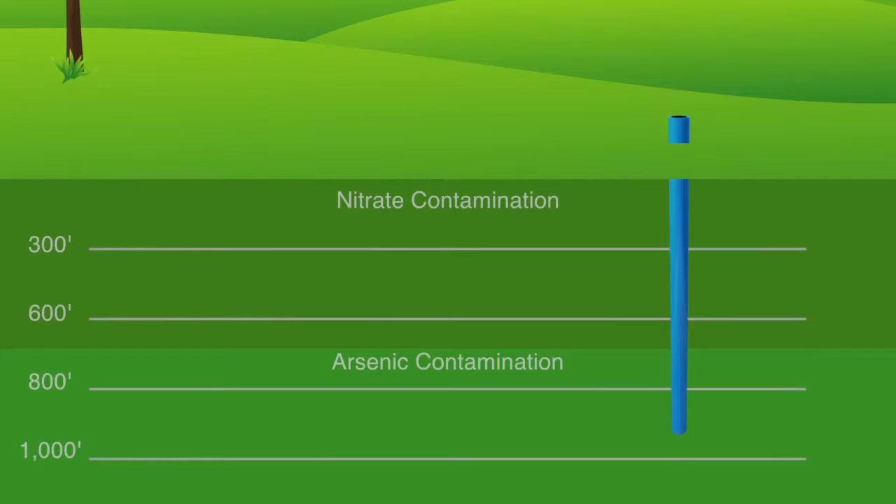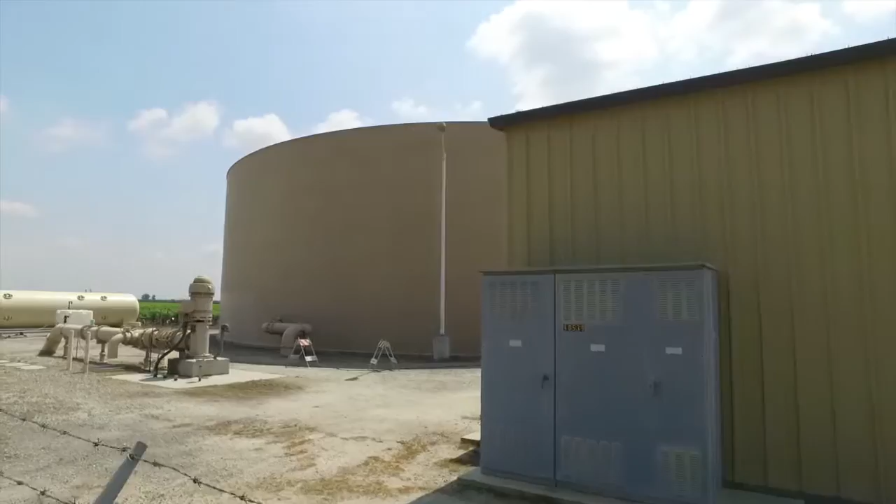So when the MCL changed for arsenic, we would have to either treat the wells that we had, or we'd have to drill new wells. Out of 14 wells we drilled, 5 had to be abandoned because we couldn't make viable wells. The other 9, 2 of those we're having to treat. So we're shooting about 50%.

The community is very aware that they are paying for quality water and they want to get it on time all the time. Nitrates going up and having to shut down that well was not going to be a pretty thing. So nitrate comes from a number of sources, including farm usage around here, very much an agricultural area. That's the most common source for nitrates. We also can get it from septic tanks.

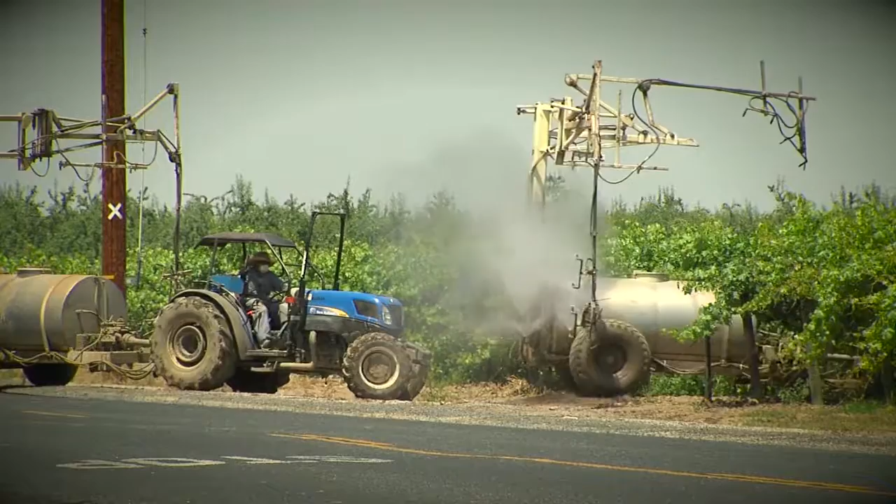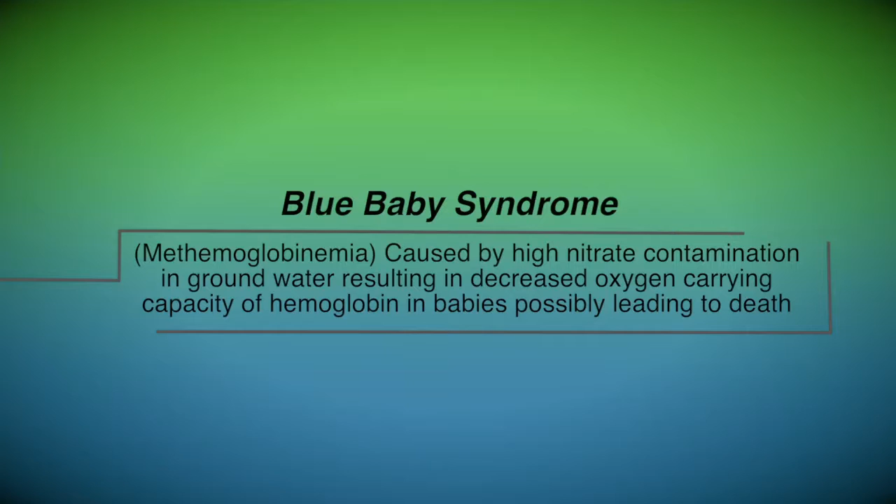The challenge is that it affects our populations in various ways in a negative way. And there's even new research showing that there's even greater effects on the wider population that aren't yet quite understood. The main known health effect associated with nitrate is called blue baby syndrome. It's essentially a reduction in the oxygen carrying capacity of the blood. And this is a particular issue for infants where nitrate gets into the gut, can be converted to nitrite, and then literally the capacity for oxygen in their blood decreases. So you lose the ability to move oxygen throughout the body.

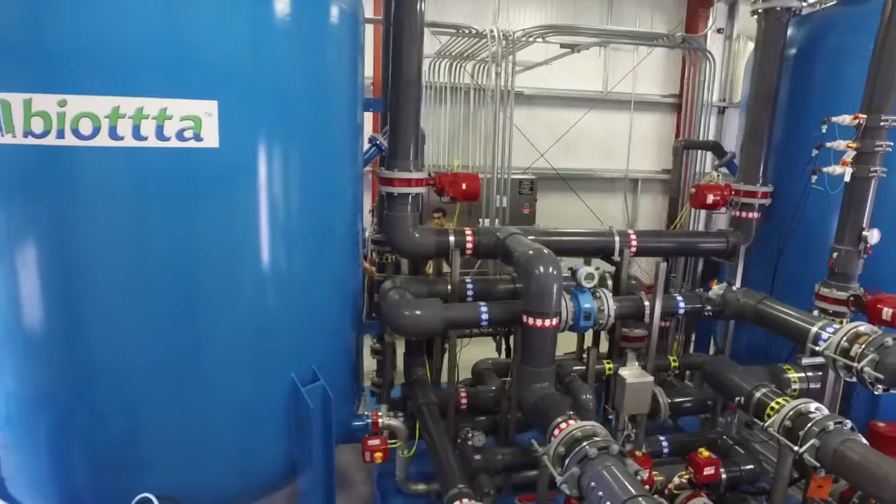Biological treatment is really an old school concept of using naturally occurring bacteria that are already in the groundwater, letting them grow up into a biological reactor and using them to chew up the contaminant and convert that contaminant to a completely harmless end product. You might call the nitrate to these organisms kind of like a Hershey bar. They're able to utilize the energy that comes from that, and that's how they grow. That's how they get the energy to grow.

MCL stands for maximum contaminant level. It's essentially the standard that the EPA sets for a particular contaminant in the groundwater. This particular well has a nitrate treatment issue. It's now above the legal limit for nitrates in the groundwater, and so a treatment system has to be put in place in order for them to use this as a reliable source of groundwater for the drinking water system.

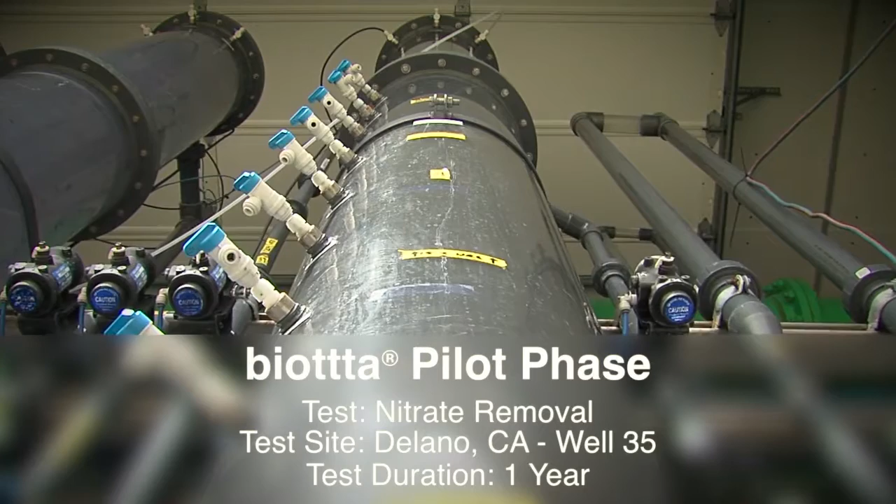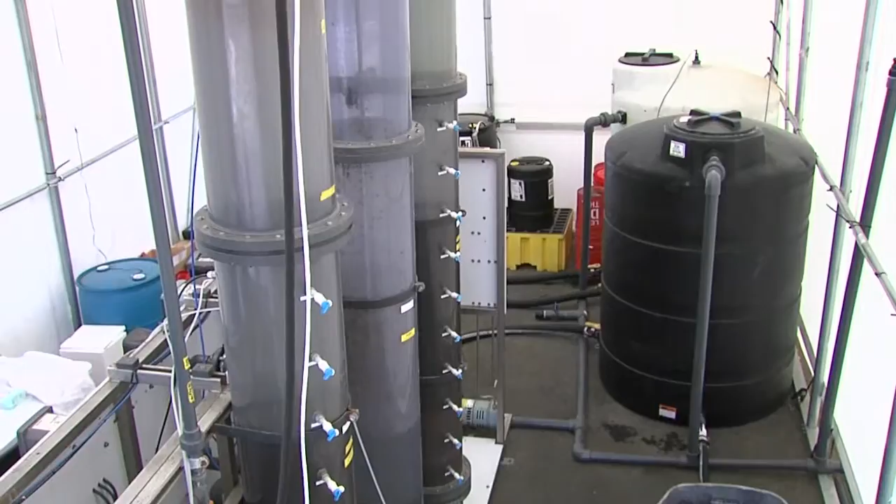So this is the City of Delano well 35. This is about our 3rd generation biottta pilot. We have the raw water that's coming in, and you can see it's going to these break tanks. So once the water gets there, the pilot takes over. And there are basically 4 main components to these pilots.

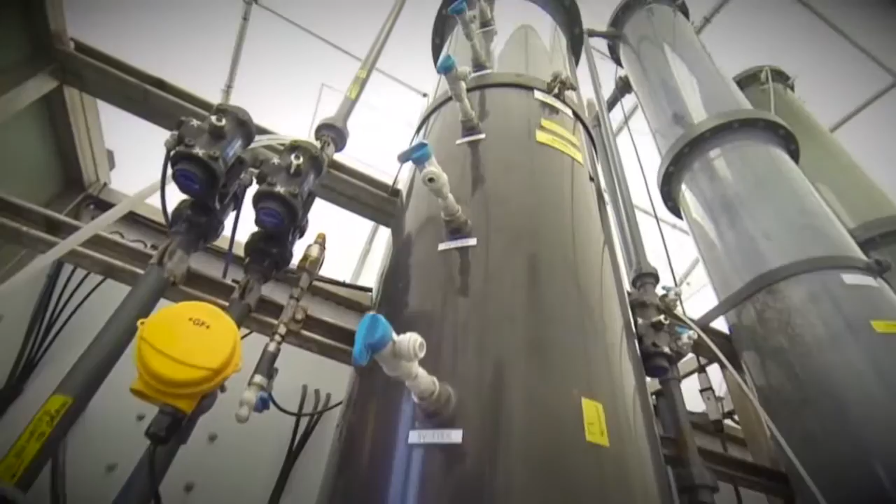There's the unit processes, these tall columns right here, a feed pump here that takes water from the raw water break tank and pumps it through the system and to the unit processes. So this is the first stage fixed bed bioreactor here, where all the nitrate gets reduced to nitrogen gas. So this is the granular activated carbon that we use.

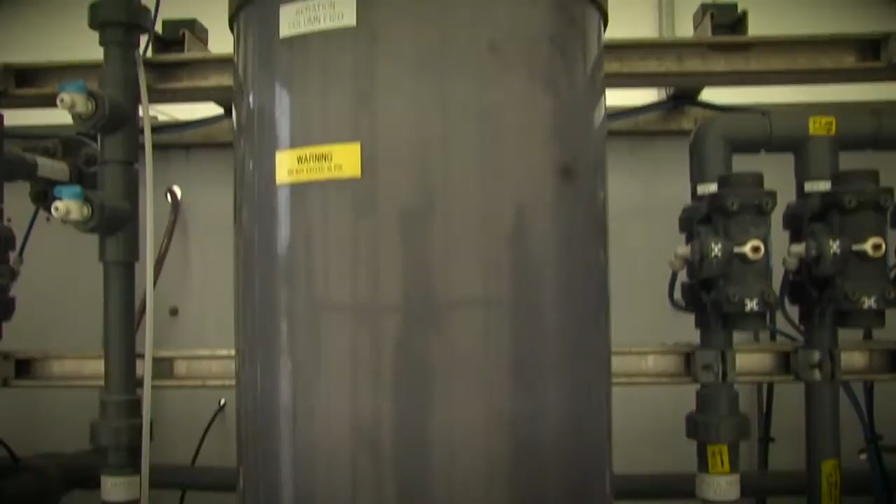As you can see, this is absolutely fresh activated carbon, so we're not inoculating bacteria before we put them inside the BIOTTTA process. So we use bacteria that's already existing in the groundwater. The water then passes, it can either go into the second column, which is a degas unit, or it can bypass that column altogether and go into the second stage aerobic biofilter, that third column right there, which is both sand and GAC. So the first component is the unit processes.

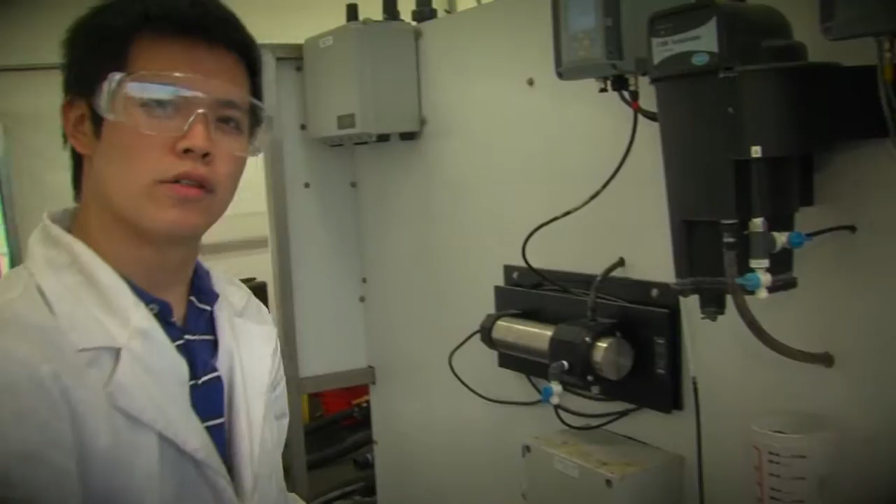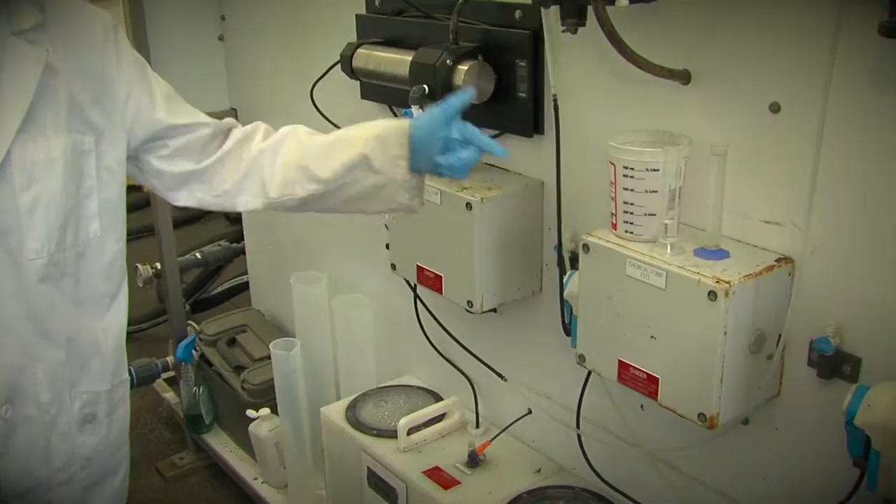The second main component of our BIOTTTA pilots are the chemical feeds over here. You can see 5 tanks down below here that we keep full of like the food for the bacteria. These tanks are filled every few days or so, and then little peristaltic pumps feed those chemicals into different parts of the unit process. So right now I'm making chemical stock for the chemical tanks that feed into the BIOTTTA process. So you can see these are the peristaltic pumps, and we can automate so that they pump a certain speed, a certain dose into our BIOTTTA process.

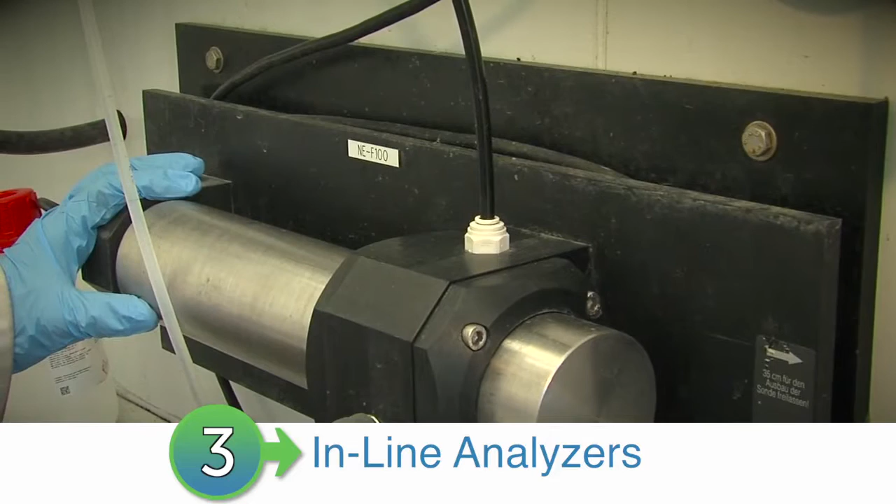The third part of our pilots are the inline analyzers, which you see above the chemical feeds. We have our inline nitrate analyzer, dissolved oxygen meter, and then 2 turbidimeters here as well. Perhaps the most important is the brains. The fourth component, our PLC, which runs the system.

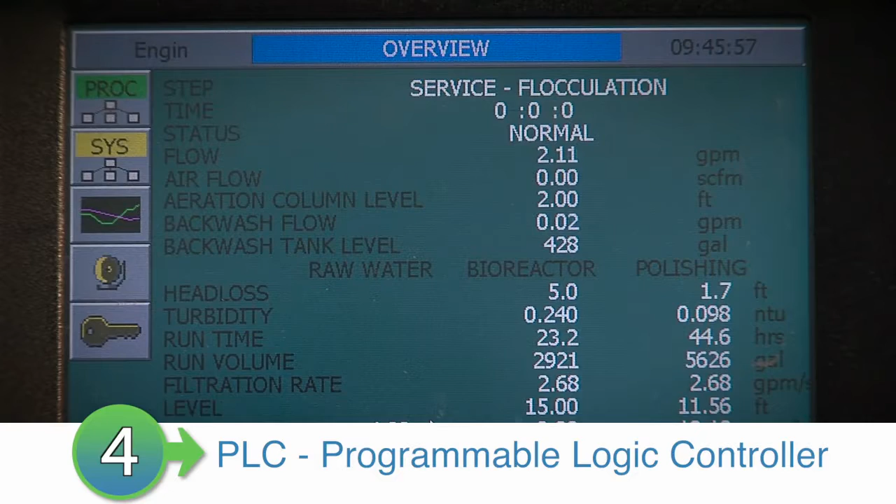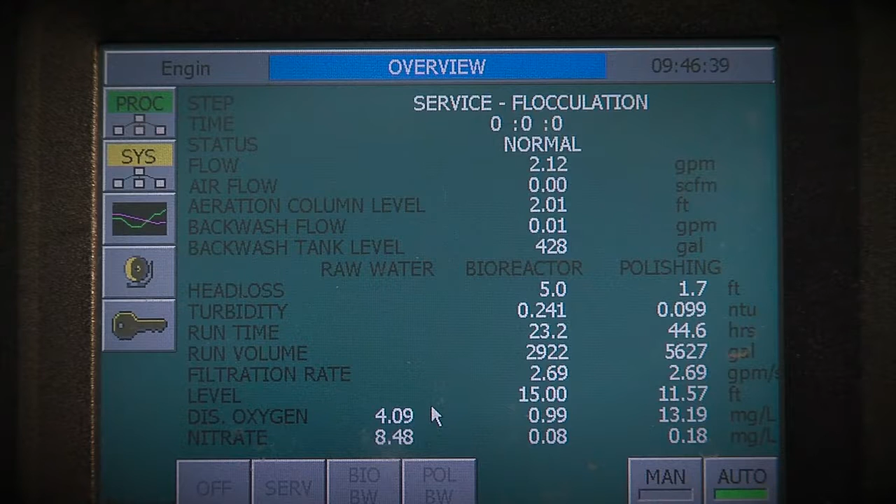It's very important that these systems are completely automated, so the system is programmed based on the operating set points that we've developed and honed over the years, and we can go in here, physically set those operating set points if we want, and download data and so forth right here on site, or this same human-machine interface right here, I can download onto my laptop wherever I happen to be, and look at that same screen and change operating parameters, download data, and things like that. This is the whole thing that makes the system go.

There are 2 main reasons why the BIOTTTA system is particularly green. One is that it converts contaminants to harmless byproducts. The second thing is that the BIOTTTA system requires very, very low energy to operate. The O&M costs on this system tend to be very low. We want to be able to put these systems in, and then they just go.

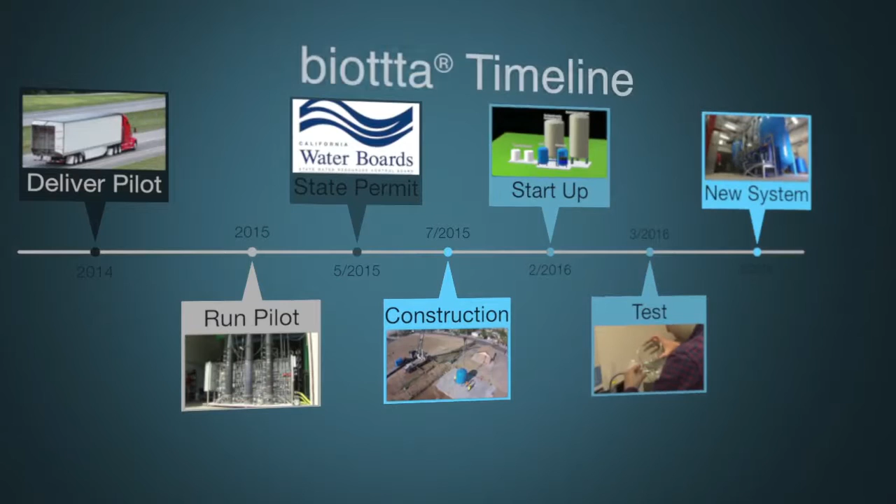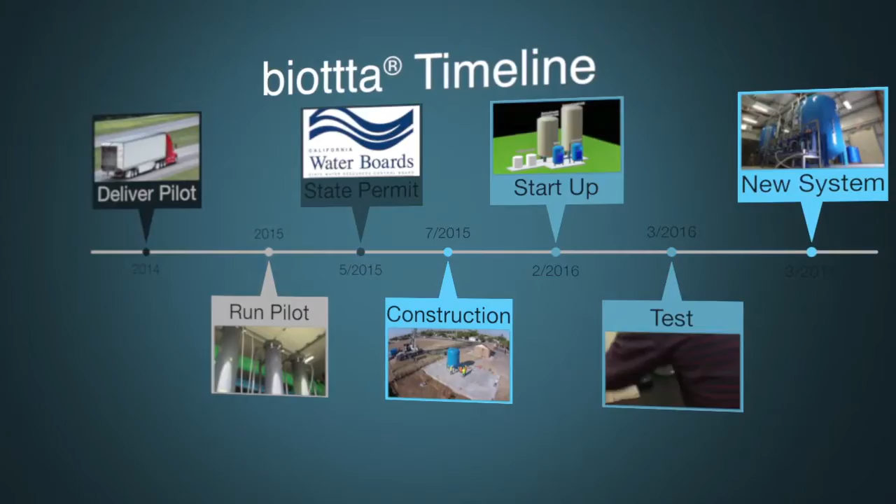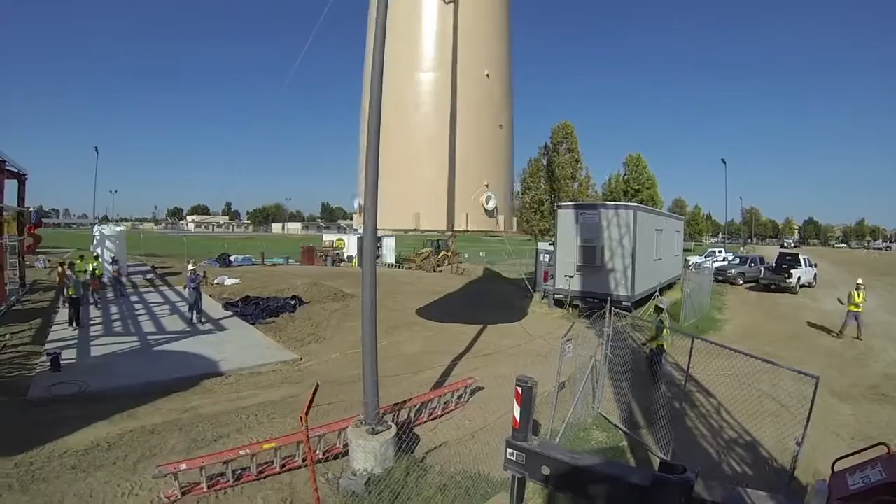The California Division of Drinking Water is a group we've been working with for a long time. They've given us the conditional approval for the process, and we'll be permitting the full-scale system that goes right here at well 35. This process has started for this particular installation about 2.5 years ago, where we went and approached the state of California as a new technology that could solve a widespread problem throughout the Central Valley here, as well as throughout California, and ultimately throughout the United States and the world.

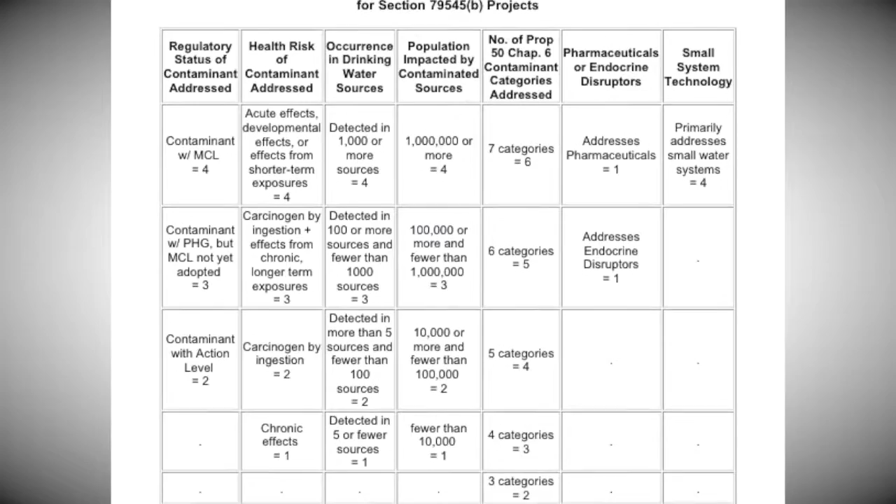I found out about the Prop 50 Chapter 6B grant money. It is specifically targeted for research projects to address a contaminant that is of widespread concern. And the City of Delano was very excited to partner with us in this opportunity. Carollo has been an incredible partner with the city for the fact that we got to be the first site to be able to utilize their technology and their pioneering efforts, and even more, for it to be successful, I think it just speaks volumes in regards to their initiative and wanting to make sure society is able to progress and Delano benefiting.

So the pilot testing showed that we can remove the nitrate from the groundwater very efficiently in short contact times. We used all those design criteria from that pilot study to build this full-scale system behind me. There couldn't have been any better results. It looked fantastic, and so there's very little doubt going into a full scale when you have such good pilot work.

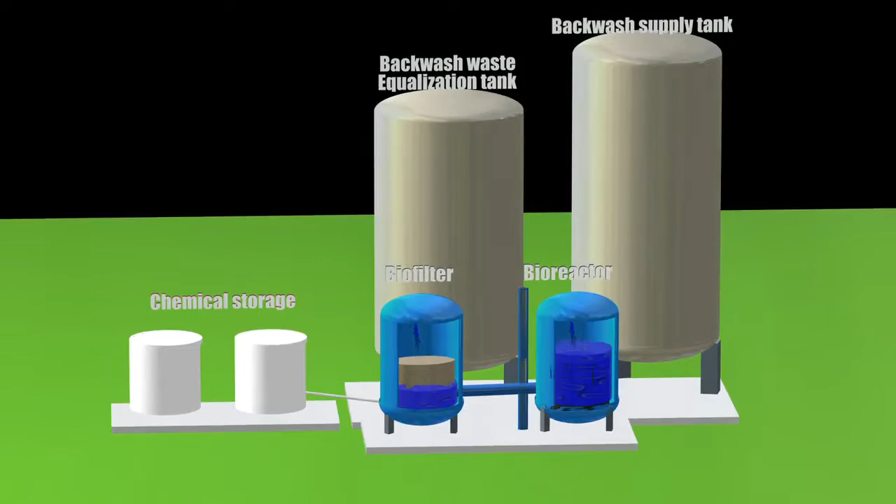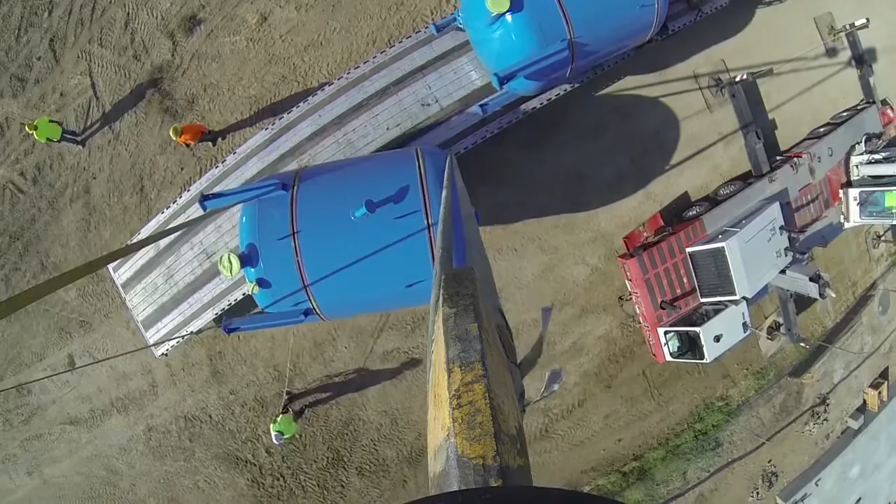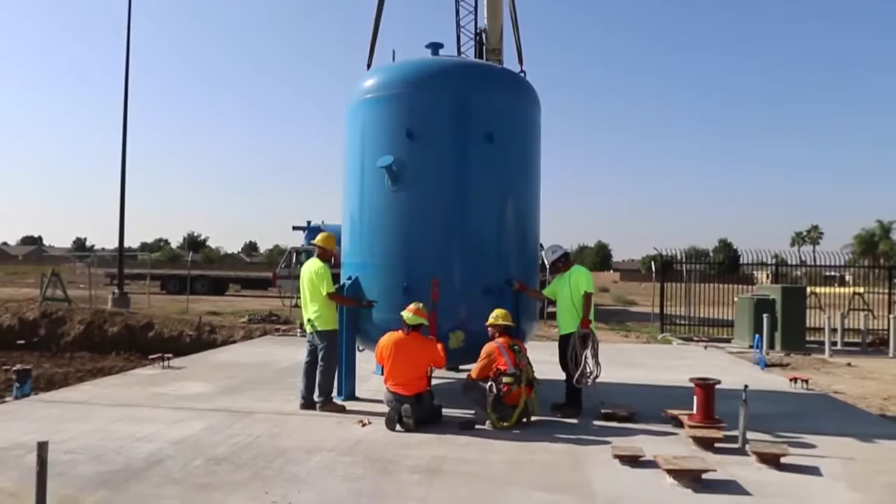AdEdge is an applications company. We bring technologies in the marketplace and apply them for communities, mostly in the groundwater industry for municipalities. And in the case of biottta, it's a biological process that's been developed, and then we bring it to the marketplace. In the case of Delano here behind us, we have a number of sub-assemblies that were manufactured at AdEdge in Duluth, Georgia. And so what that does for us is it allows us to control the manufacturing process and then deliver components to the site that then get tied together.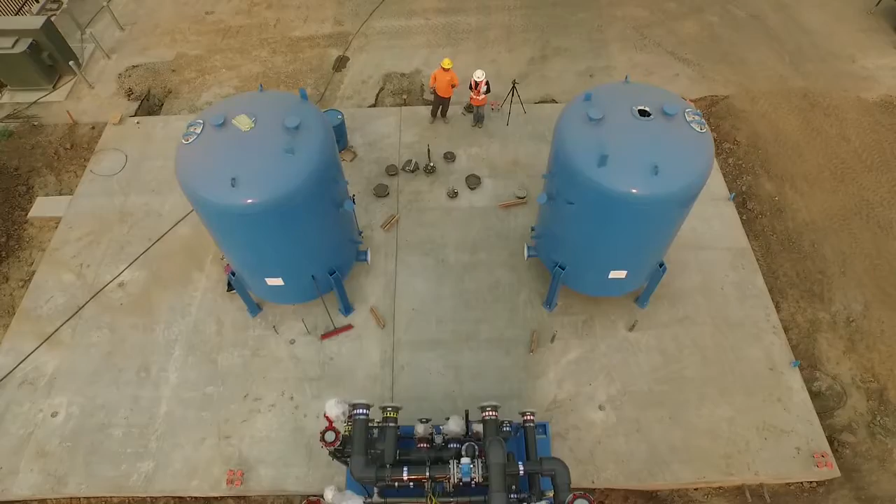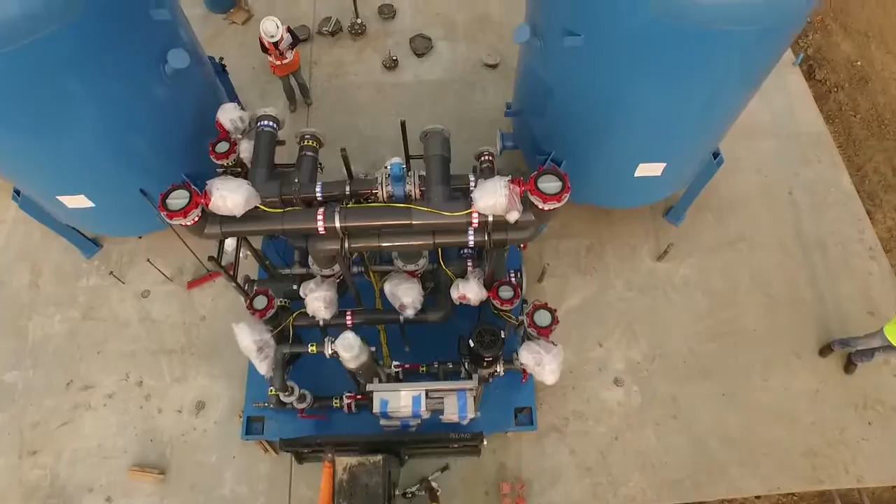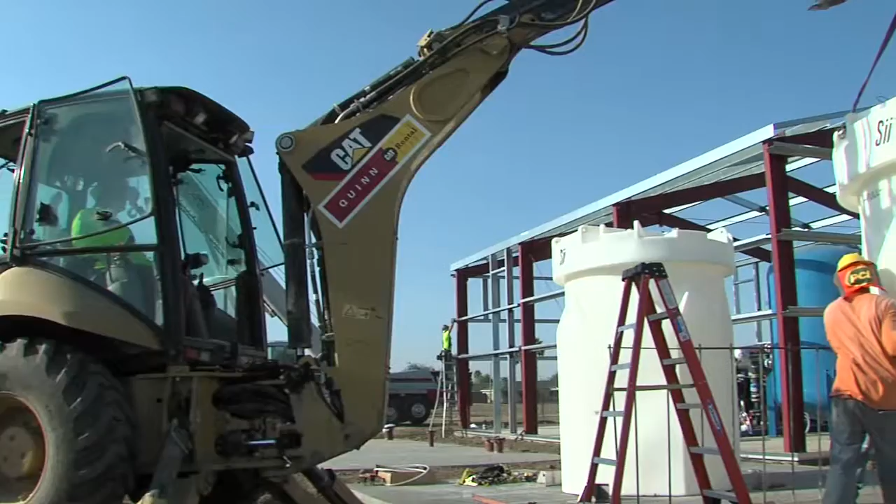So we have one main degas skid in this case that holds our process pipe, our valves. A lot of the moving parts are on that main skid. And then we have a water quality analyzer, chemical feed process, and our blower and backwash package. So once that's delivered here to the site, a contractor will then pull together the vessels, the sub-assemblies that we provide, and it'll finally be tied together by AdEdge coming out and doing an integration.

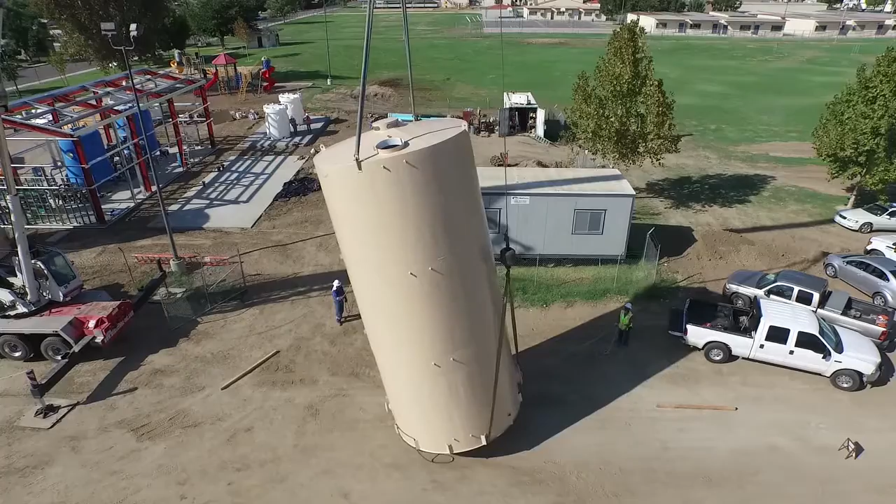Our vessels are manufactured by a vessel manufacturer that specializes in steel and fabrication. That's all run through AdEdge. We're the ones selecting the manufacturers. So you can come to AdEdge and say, hey, this is our issue, and essentially then we deliver you a solution from an equipment side.

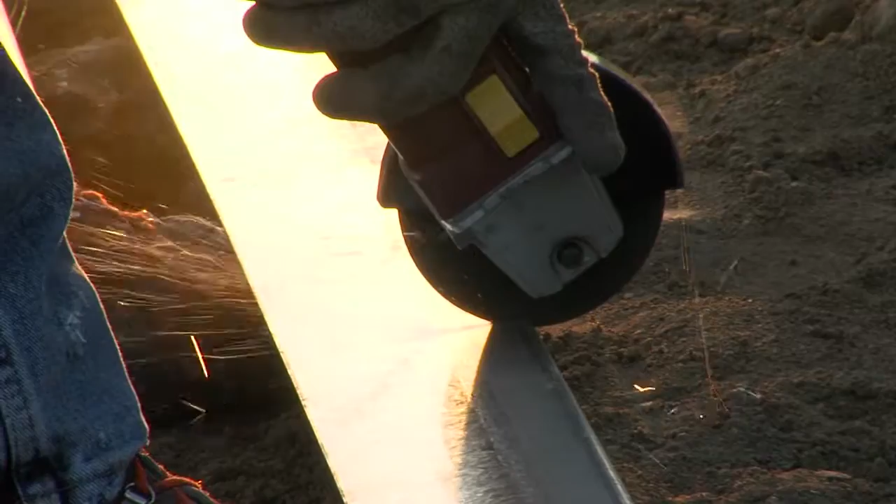When you bring the vessels in and then you bring another skid in and try to pull all that together, essentially it fell into place as if it was puzzle pieces made out to be. You know, design was done very, very smoothly. The overall project came together in a very short period of time. Anywhere from the design to the manufacturing to the installation to now the system startup, everything has been very smooth

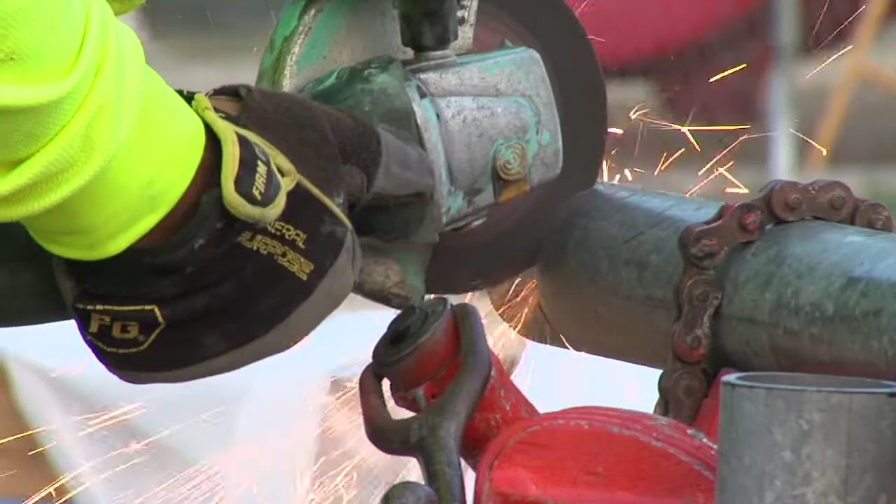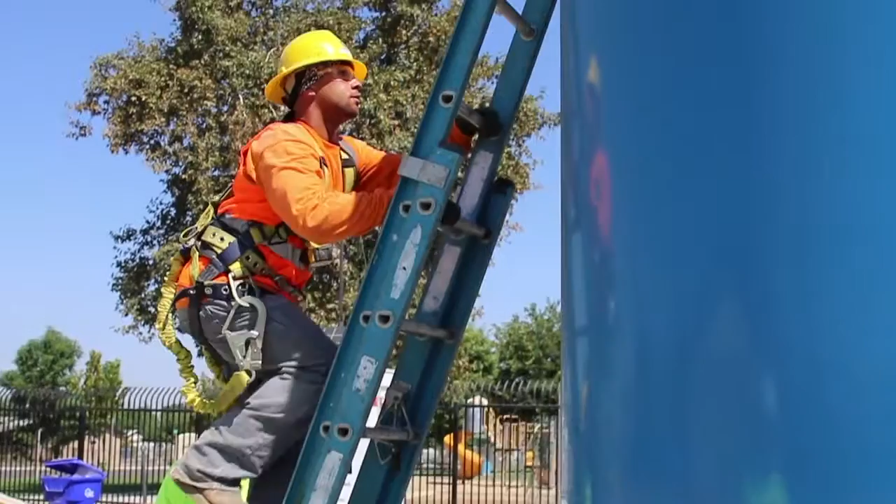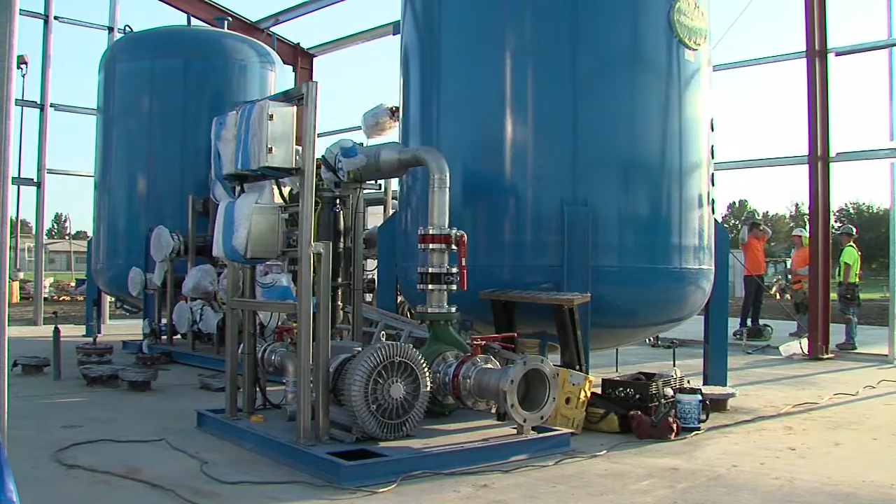and operating successfully. We've had a relationship with Carollo for years, so again, it went very, very efficiently, I thought. The construction process went as well as any of our other projects that we've had, even though it's new technology. PCI has done a good job at not being overly burdensome on the community there.

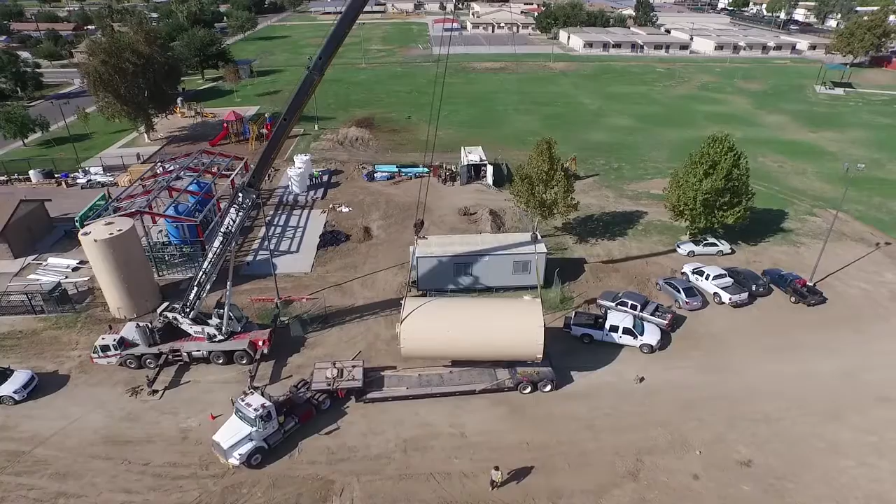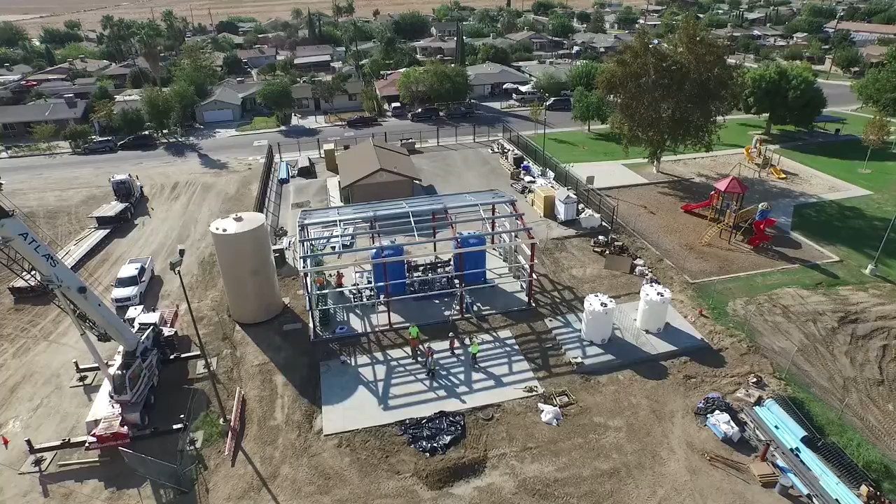The real baseline of the technology and the process at its core has been done throughout the United States and the world for decades and decades, just other applications. What we've tried to do here is take the basic concepts, see where there have been challenges in the ways that they've been applied in other treatment processes, and try and improve each of those areas, get over the hurdles that have caused the problems in other places. And that's why we've landed with this type of a system.

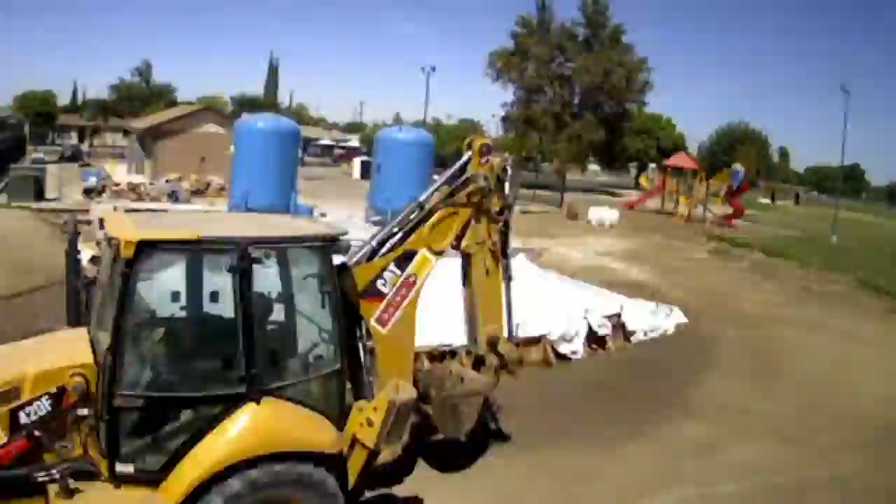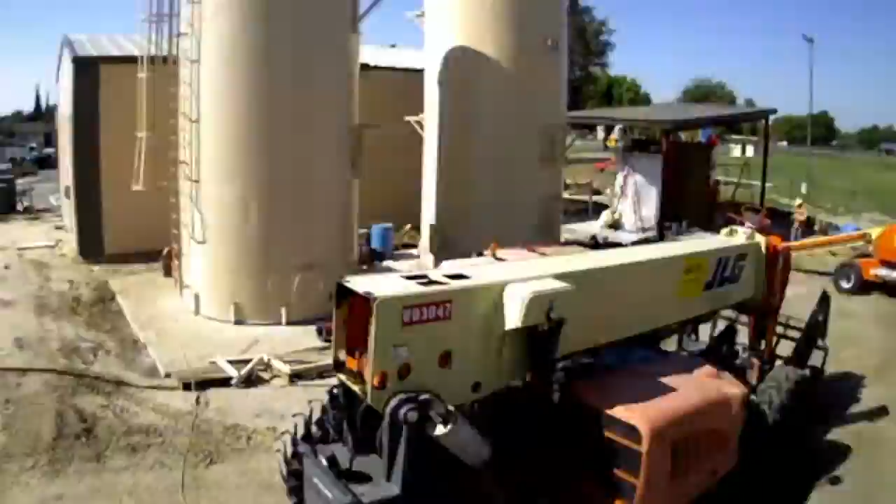And so what you see here is a relatively small system, but it's easily scalable and modular up to millions of gallons per day. From the time that we went into manufacturing, I believe it was around 16 weeks until we delivered the equipment to the site. And then from the time that equipment was delivered, it was about 5 to 6 months before the plant was fully constructed. Things came together very rapidly.

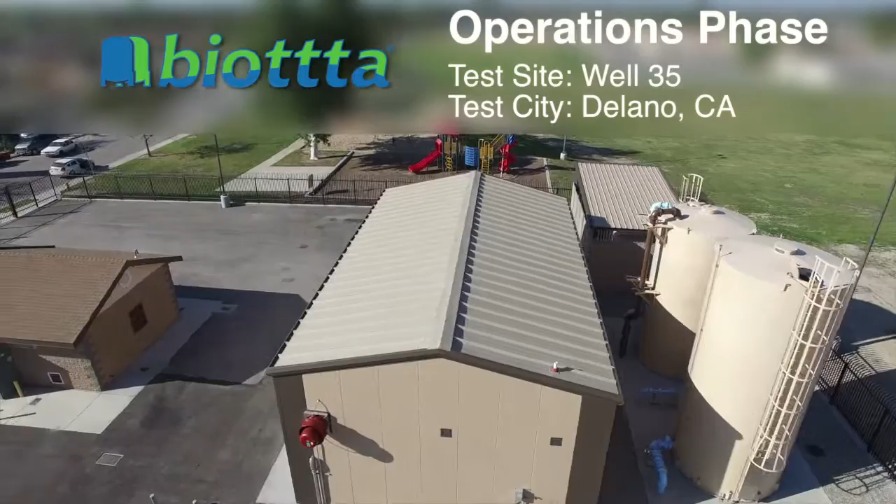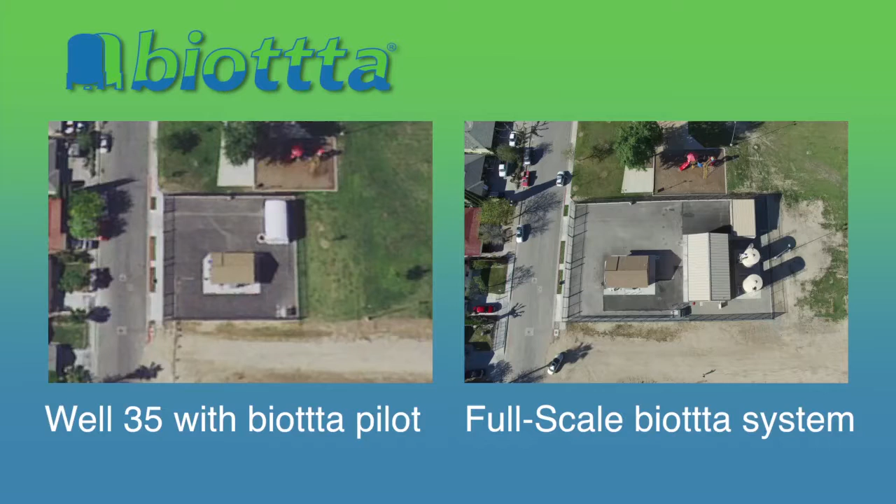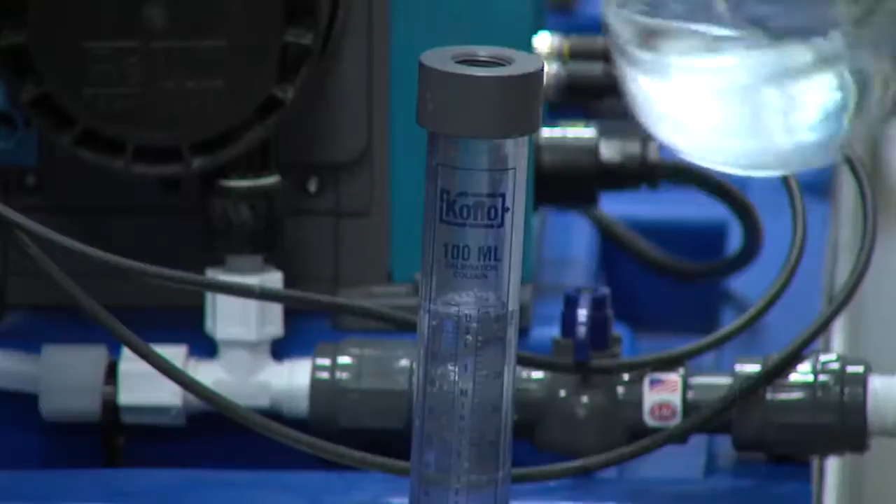I think the goal here is to make the bench version of what we tested work in a conventional setting. It's really a great thing for Delano to be able to use a well that they put in where they couldn't before, and now they'll get the benefit of that water. Every plant is the same to operate, just depends on how big it is. I work here maybe 2 to 4 hours a week. The only reason I really have to come out here to the site is to ensure that I perform my laboratory tests as the regulators require.

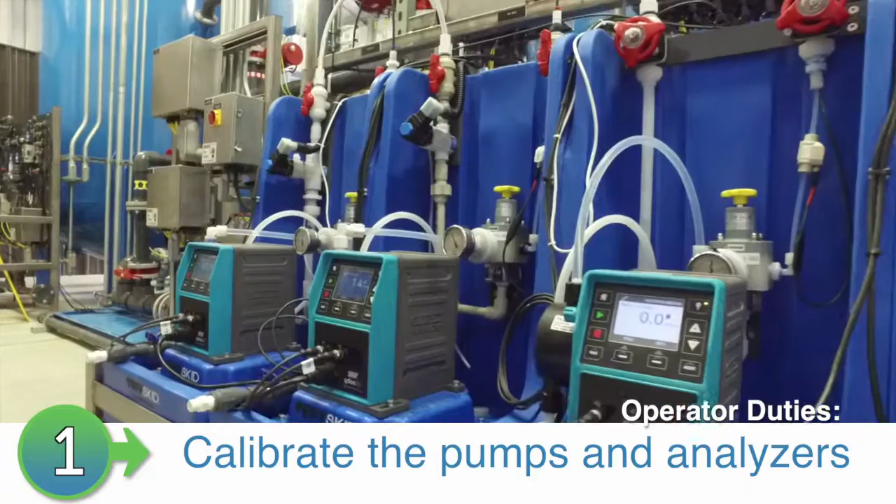There are 4 main duties that an operator must perform at a biottta operation system. The first one is to calibrate the pumps and the analyzers to ensure that they're pumping and analyzing correctly. We need to pump chemical based on what the analyzer tells us. So those 2 components are critical to biottta operation. The second operator duty would be to check and order new chemicals and materials as required. The third duty would be to maintain and keep the plant clean. And the fourth operator duty is to ensure that laboratory tests are performed as the state and regulators require.

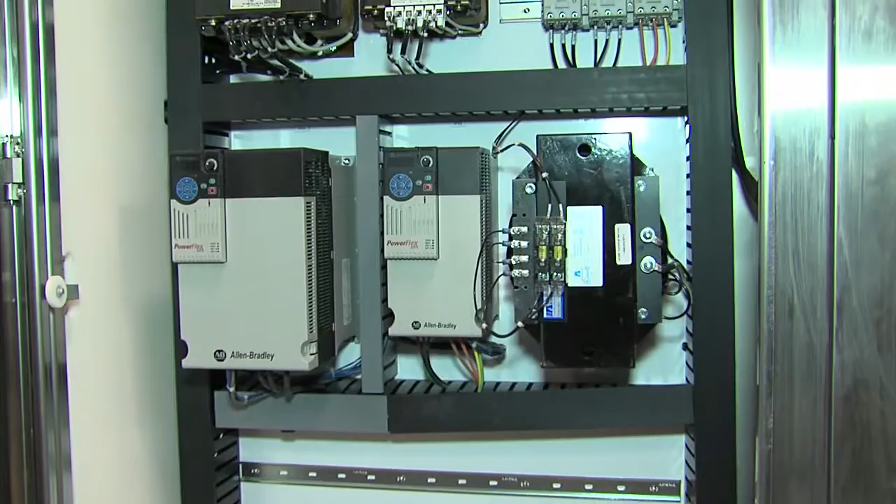So this is our programmable logic controller for the biottta facility. This is the brain of the facility. It controls all of our pumps, all of our analyzers, our chemical feeders. So it's monitoring everything that's going on in the system and telling everything what to do. It controls not only the brand new biottta facility, but the original well facility as well. This gives me total control over every aspect of the plant.

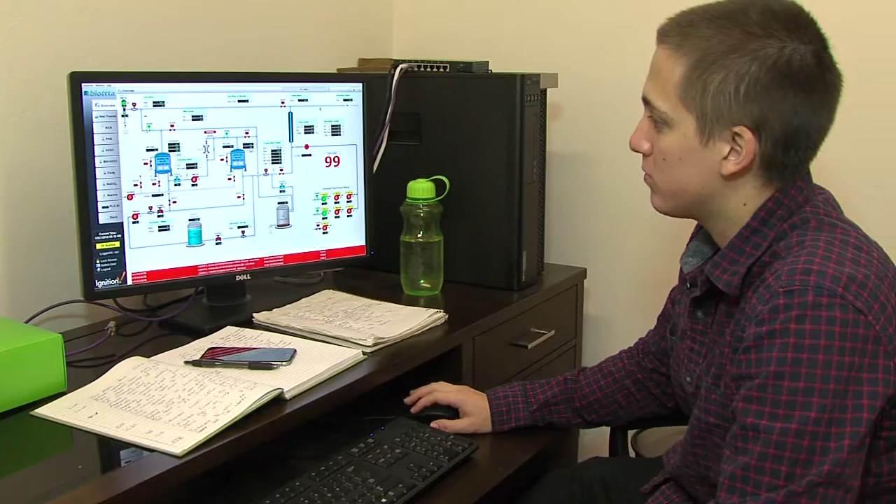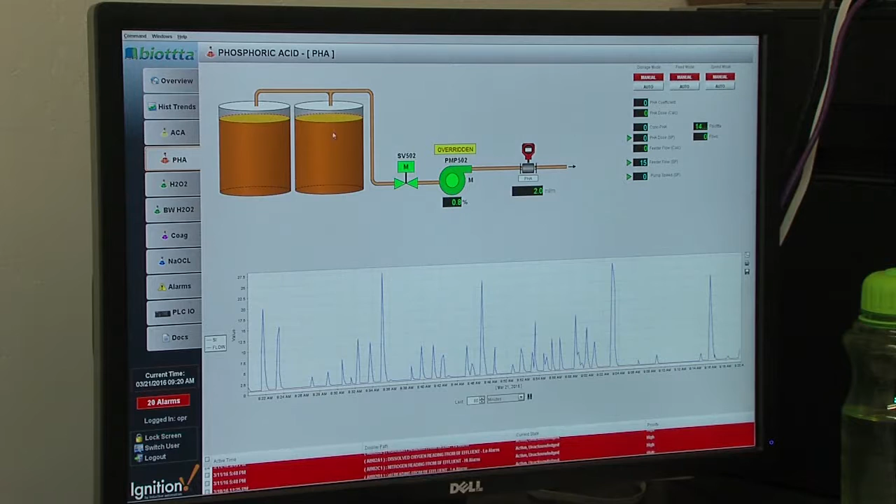We can see the results of all our analyzers. It's real time. We can also see how much chemical we have. Acetic acid, phosphoric acid, so you can see the tank levels. We have our hydrogen peroxide, our other hydrogen peroxide pump, coagulant. We have our PLC input-output.

And I think we've learned a lot just in the operations end of it. Engineering and operation are two different facets of what we do. So from the operations end of it, we've figured out some things that we may not need somewhere else, and some things that we may need to upgrade somewhere else.

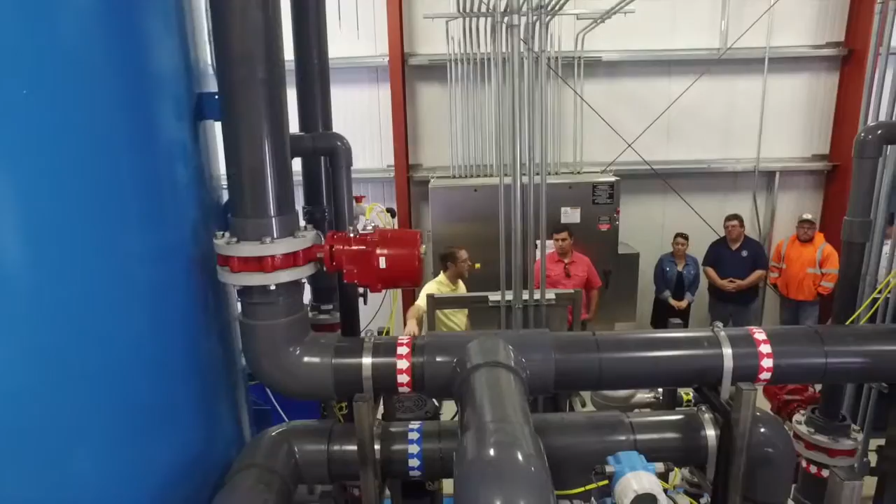Well, the education process that the grant will furnish is that there will be all the training involved for our staff, plus there's going to be additional training and classes for people that want to come in and look at the new technology. The goal is for this to become a demonstration facility and an education center for nitrate, the problem of nitrate, the challenges of where it is throughout the state of California, and a new solution that can be applied throughout the Central Valley and other locations around the state and around the country.

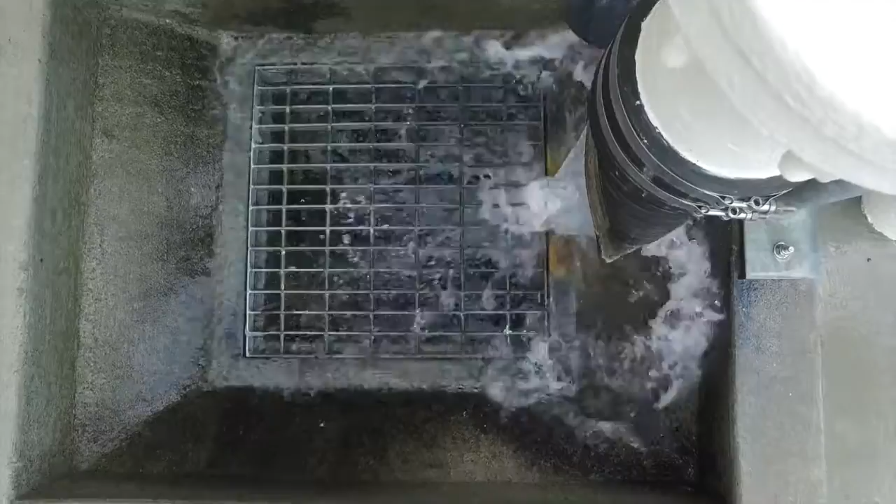You really want turnkey operations. The idea of this plant is you turn it on, it works, minimal supervision, minimal operator interface, and that's really the key to biottta.

I'd just like to welcome everyone to today's Nitrate Education Center and treatment facility at Well 35. Obviously, water is a precious resource, and just about 9 months ago, this well had to be shut down because the nitrate level reached a point where the water could not be given to our people in Delano. But due to this new technology, this pioneering technology, we are taking the steps to hopefully make an example of what this could actually do for not only Delano, but the state of California and possibly across this nation.

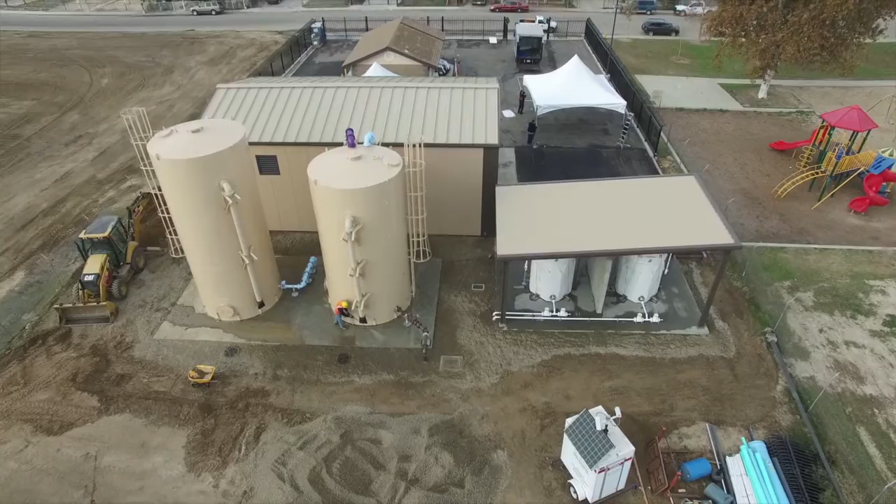There hasn't really been technology in the past that is as versatile as what Dr. Brown has put together here in this facility. It's truly a remarkable piece of technology. I know working on this project a couple years ago, when we talked not only about this well but some of the other wells, not just in the city of Delano but even in the Central Valley, some of the things that we're always concerned about are the reoccurring nitrates and arsenic.

And when I looked at this project and when we saw what Carollo was bringing to the table with the biottta system, it's really not just an investment in the community, but in this technology to see how well it's going to work, right? Because at the end of the day, I know for the mayor and the council and everyone in the community, they want safe drinking water.

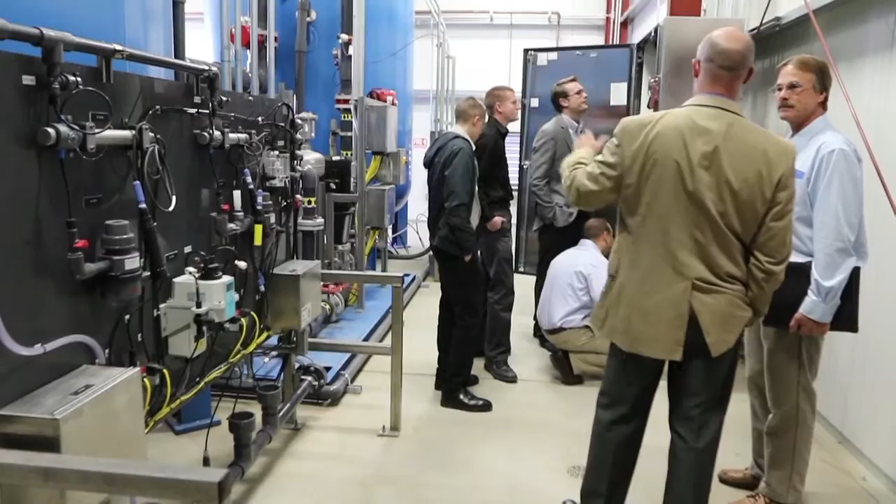To have this not only be a treatment facility for nitrate, but an educational opportunity, to be able to bring people from the surrounding communities in and teach them about what this is, and that it's not magic, that it does work, and it's based in science and engineering and it can be applied at this scale, at larger scales.

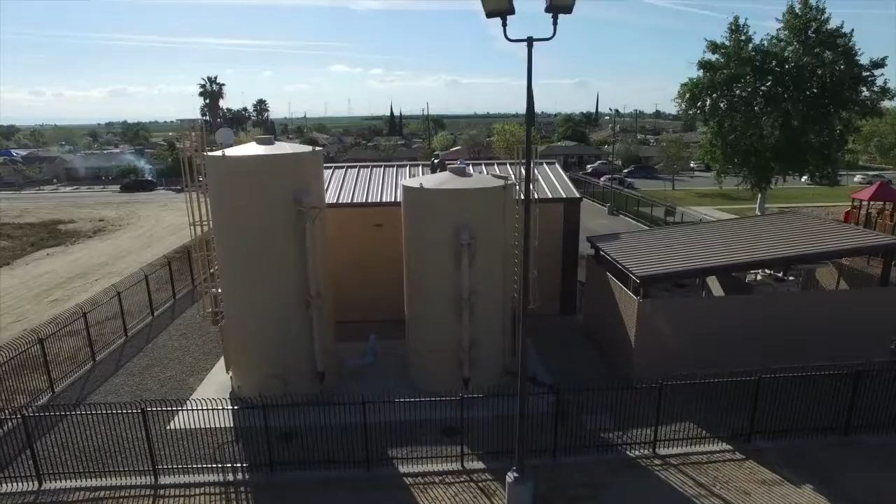That's the next part of the magic that we want to help create and have happen, and really solve this problem that we've been struggling with in California for so many decades without a solution like this, that doesn't just take the nitrate and push it down to somebody else's problem as we concentrate it. We're destroying it in an environmentally sustainable way, and with very low energy doing it. So I'm just really excited to be here.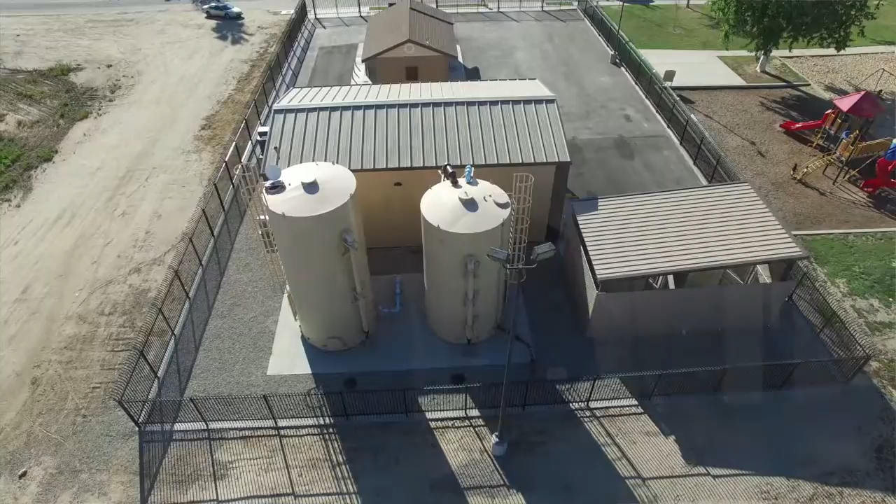We've been talking about this day for so many years, and thank you for coming and thank you for having us in Delano for all of this time. Delano has been an unbelievable host for us to be able to come and play with some toys here for the last couple of years, and we hope to continue that relationship for a long time. Thank you.

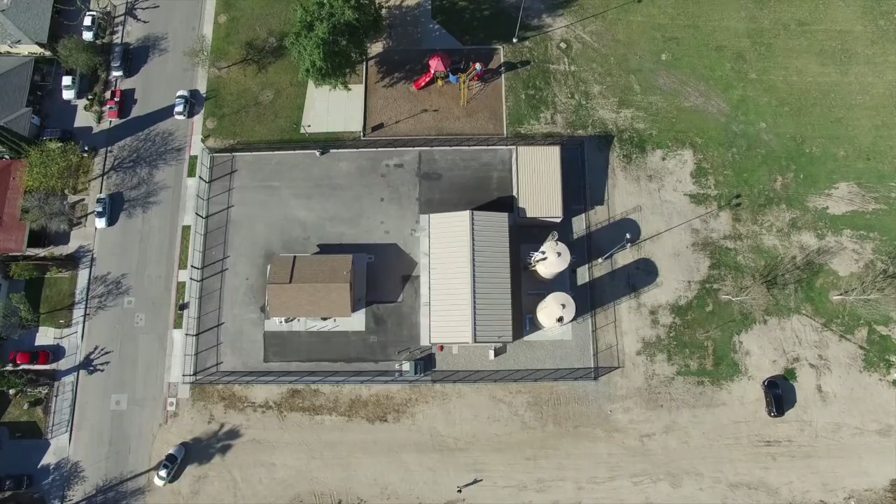The facility's been operating for a little over a week and a half now. The nitrate's coming in at about 10 milligrams per liter, right at the limit. Coming out of the system is less than 0.2 milligrams per liter, so we're getting complete nitrate reduction. We have some optimization of the post-treatment left, but right now everything is looking great in terms of the nitrate removal. A lot of the challenges that we foresaw are not going to be challenges for the process. So it's going to be simpler for the process.

And with that, you have a product that has a higher quality standard because it's replicated. We're able to bring it to the marketplace faster, and you're going to see a lower cost as a result of that.

The fact that this was the first and only plant of its kind, and the fact that we were able to implement this technology here in Delano, makes me feel proud in the sense that the community is seeing us making sure we're providing a service. And not only providing a service, but we're looking out to the future. We're making sure that the people of Delano have something to look forward to, and that's clean drinking water. And if there's issues of nitrate, well, you know what? We found a solution.

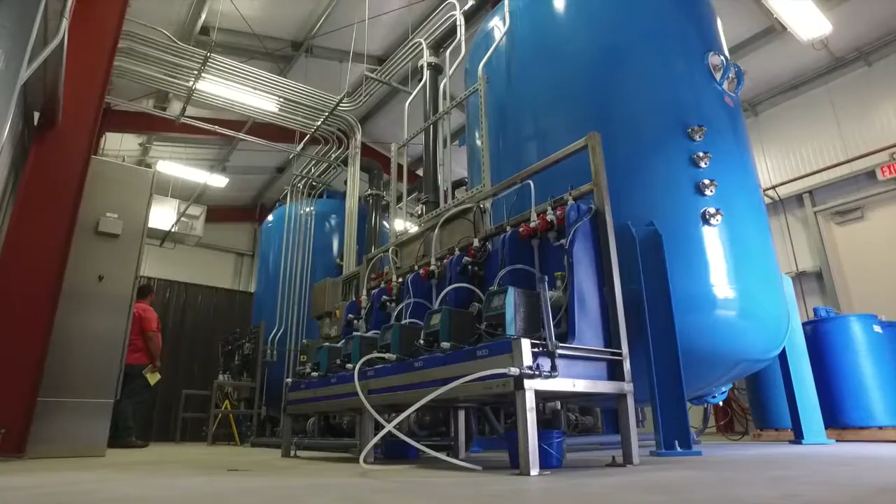When you're implementing a brand new technology, you always run into this issue: people want to go see a full-scale facility. They want to talk to the operators. They want to see it operating successfully. You need a full-scale track record. Up to this point, we've not been able to point to a particular facility, and so it's been a barrier to implementation of this technology. This facility is going to help us overcome that. It's really going to open up some doors toward implementation here in the Central Valley, across the state of California, across the United States, and really globally as well.